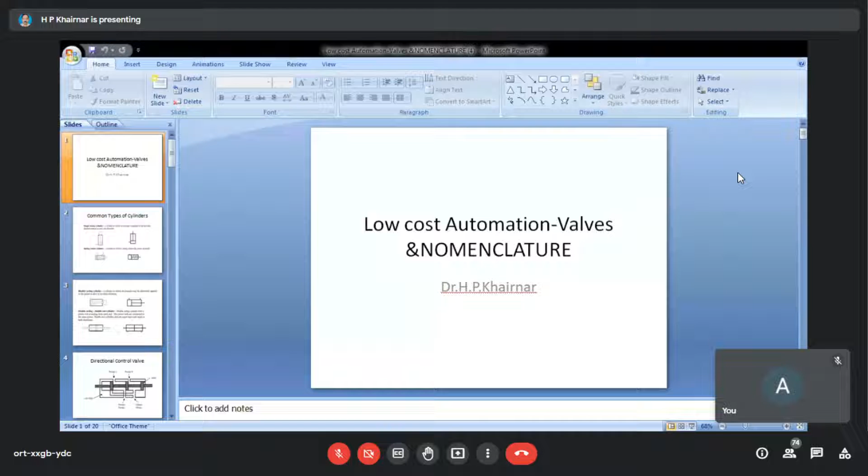This is pertaining to the different types of elements - not only valves but actuators also. So what different types of valve elements are being used, we will go through first about this low cost automation. Some of these elements you might have seen earlier, probably in one topic called fluid power.

The first actuator - there are basically two types of actuators. One is the reciprocating actuator, that is you can imagine with the help of piston cylinder arrangement. And then another actuator is the DC motor, that is the rotary actuator - DC motor, stepper motor, these are rotary actuators. Here we will be concentrating on the reciprocating actuators, because whatever circuits we will be forming will be all with this actuator.

So there are two types possible: one is the single acting cylinder, another one is the double acting. This single acting cylinder means - you can imagine on the left side there is a cross sectional diagram, and on the right side it is a symbol. It is a cylinder in which air pressure is applied to the movable element, that is the piston, in only one direction. That is why it is called single acting cylinder.

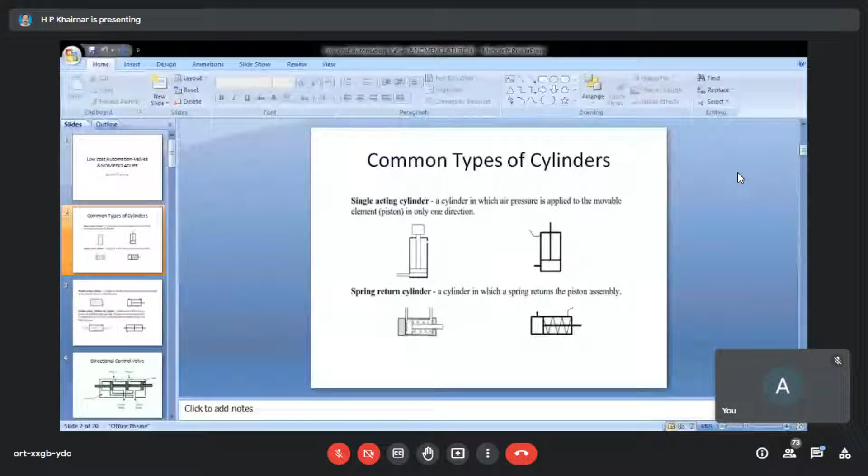Then the next actuator or cylinder, what we can call it, double acting cylinder. It is a cylinder in which air pressure may be alternately applied to the piston to drive it in either direction. So in whichever direction you want it to actuate, supply from both directions is possible. On the left side you see the cross-sectional diagram, and on the right side the symbol, where two vertical lines indicate the supply from both directions.

Another possibility is the double acting double rod cylinder. The diagram is given, you can imagine it. It is a double acting cylinder with piston rod extending from each end. The piston rods are connected to the same piston. Double rod cylinders provide equal force and speed in both directions.

For some special applications, you may wonder why these particular piston and rod arrangements exist. There are specific functions in industry, automation circuits, as you may have observed if we have visited Siemens and other industries, where you need to carry out very small operations like conveying operation.

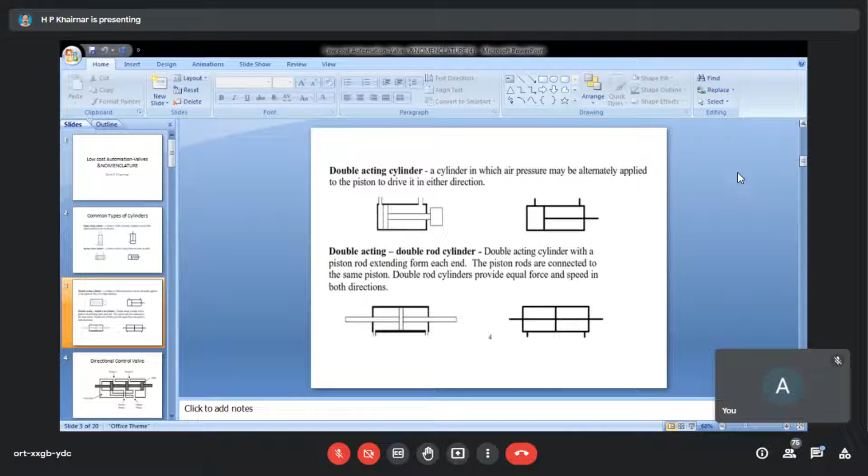This is one of the most important things, called directional control valves. What are these directional control valves? There are different types of valves, which you might have seen earlier. Does anybody know what different types of valves are there?

Later on there may be questions about different types of valves. Right now you are observing one cross section, but there are other types which you might have used earlier, especially pertaining to fluid mechanics or fluid machinery. If you are able to recall or identify those types of valves, just let me know.

Butterfly valve. Okay, butterfly valve, we will discuss it. Any other type? Non-return valve. Okay, so what you just said now, okay, gate valve. Yes, the purpose is the same.

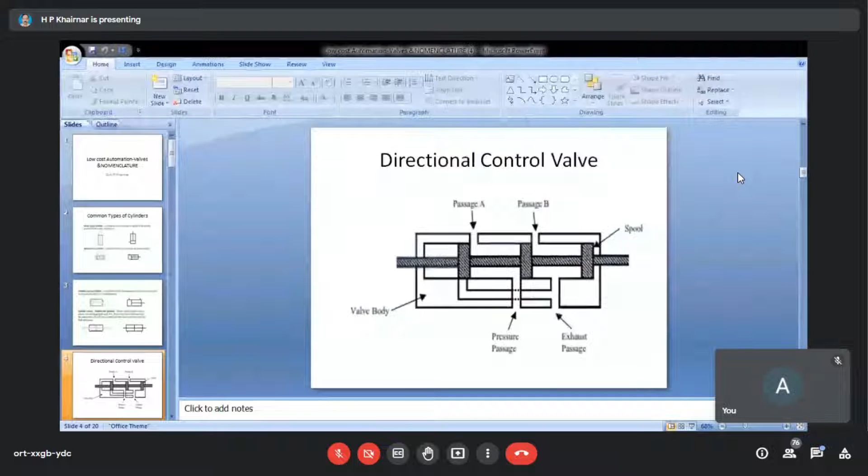Now here is the diagram that is showing you two different positions, so probably you will be able to understand it. So this is the first arrangement which we have just seen. But now this is the pressure inlet, so you are applying the pressure over there. You can see with the help of arrows.

Then it goes to the cylinder. From cylinder exhaust, it is connected to B. Through B, again you can see the exhaust occurring over there. So these symbols and letters which are used over here are as per the sign conventions or procedure which is adopted in industry. That is, P for pressure inlet, Ex for exhaust. A and B are mostly the connections given to the cylinder or actuator.

So this is one of the possibilities. When you are applying air pressure at A, in the first position, due to the air pressure, the piston moves to the extreme end, to the extreme left. So if that is the scenario, once this exhaust occurs over here, next time when you give pressure inlet, you will not be able to give supply to A. You will be able to give supply to B. That is, you will be giving supply to the cylinder from the other end. So obviously, it has to be a double acting cylinder. It cannot be a single acting.

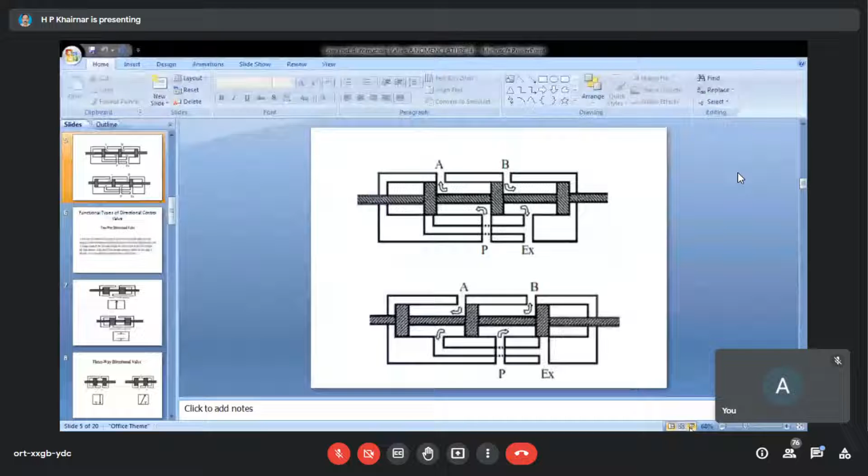But this completes one cycle of operation. That is, with this arrangement, you are supplying it from one end. Again, you are supplying it from the other end. So both the extreme ends you have actually done with the help of piston travel, and in that case we can say that one complete cycle is being performed. So this is how you can do that. Then we will see the functional types of valves.

So these are the functional types of valve. The diagram is on the immediately next slide, so that will make your ideas very clear. So here it is the two-way valve. Now this terminology you will have to keep in mind when you will be drawing symbols. Immediately after this slide, symbols are also there, so you should be able to show them according to the functional requirements. A two-way directional control valve consists of two ports connected to each other with passages which are connected or disconnected.

In one extreme spool position, port A is open to port B. The flow path through the valve is open. In the other extreme, the large diameter of the spool closes the path between A and B. The flow path is blocked. A two-way directional valve gives an on-off function. Now, maybe you will not be able to understand this entire description, but once you see the diagram, first try to imagine what kind of possibilities are there.

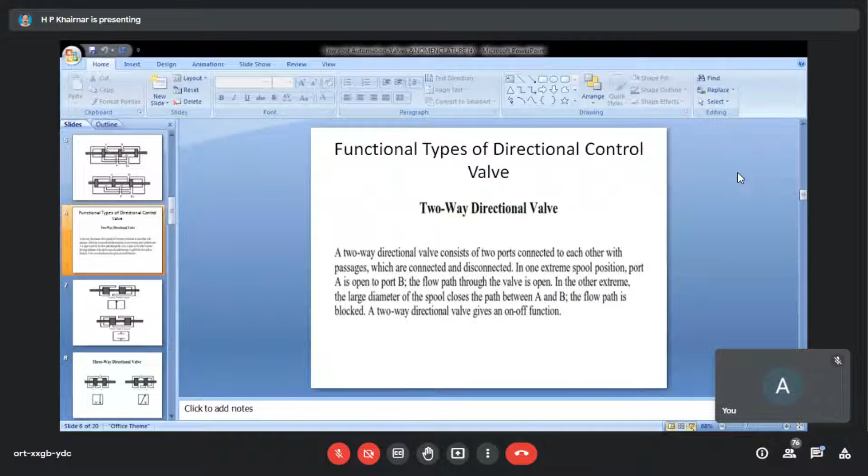Now, let me just show you the arrangement. Okay, can you see this is slide number 7? Yes, sir.

So this is now the two-way, two-port valve, for which we have just seen the description, so I think you can understand it better. There is one terminology used, you might be aware of it: normally closed and normally open position. The upper diagram indicates the normally open position; for that, the cross-sectional diagram as well as the symbol is indicated. The below diagram indicates the normally closed position, and for that the symbol and diagram is there.

So you can easily understand in the first diagram, if you are applying pressure from below, the other port will allow it to pass through. You can just see the position of the piston. The leftmost position is there, and there is a right position. So the other piston has touched the extreme end, so now it is allowing the air to pass through.

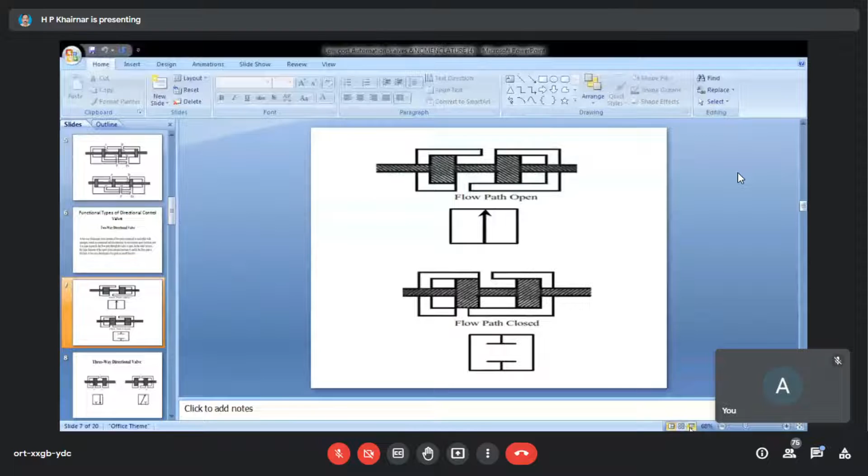What you are currently seeing for the normally open position, the same symbol should be used. That is the arrow they have indicated. In the shut off position, you have to use the same symbol. So this is the possibility of the symbol. Then we will see there is another type of valve, that is, we can consider this as a three-port valve. Now we can see this three-port valve. Now here it is again a directional control valve.